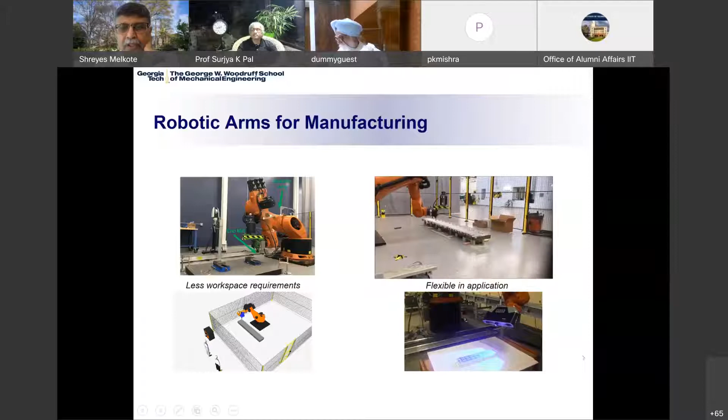But there are challenges, okay? There are challenges for us to be able to use it. And if I can go to the next slide.

So what are the limitations that actually motivate some of the work that we've been doing for the last 5-6 years or so here at Georgia Tech? Some of the limitations are that robots, while they certainly have much more flexibility, they can be adapted for different applications, they also require less workspace, they are much more compliant than CNC machine tools, for example.

Large compliance implies more inaccuracy in the part features, positional inaccuracy, orientation inaccuracy, etc., both static and dynamic. And that's a problem when you're talking about using robots for machining to produce accurate parts, where tolerances are critical. Also, because of the compliance, these robots can vibrate. They are much less stiff, at least one order of magnitude less stiff than traditional machine tools. And the vibration characteristics of robot arms are more complex than machine tools. They change with configuration.

You change the pose of the robot, you change the dynamic characteristics of the robot. So this poses additional complexity in making use of them for machining applications. And the characterization of robot arm vibratory behavior is time-consuming and expensive. This is not easy, and you will see some of the work we've done to address some of these challenges.

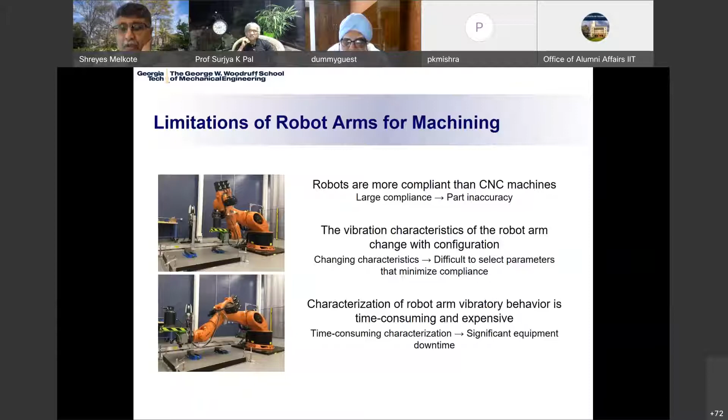So these provide some of the limitations we've been trying to address by developing technologies for accurate robotic machining. Much of it is motivated by the needs of the aerospace industry, which would like to make use of such technologies for assembly of large structures, where you need material removal in a much more flexible environment. So that's what's driving a lot of this research, both here in the US as well as in Europe and other places.

Now, what are possible solutions for low accuracy, which results from the high compliance of these robots? Obviously, we could design a robot that's a lot more stiff. People tried parallel link manipulators - these types of robots are out there, they're used, they're very fast, they certainly have higher stiffness, but their work volumes can be limited. It tends to lower flexibility, cost is also higher. You can also reduce the amount of material removed if you want to use this for machining, but that's counterproductive, because you want to maximize material removal rates, not reduce them to reduce force.

The other approach is to actually compensate for the errors in position of the robot. It's important to note that off-the-shelf industrial robots have very good repeatability - that's why they use them. Repeatability can be on the order of less than a tenth of a millimeter. But their accuracies - robot manufacturers don't quote you on accuracy because it's hard for them to do so. Even well-calibrated robots, accuracies tend to be slightly better than maybe a millimeter, which is very poor for machining applications, where tolerances may be on the order of tens of microns. So not good enough.

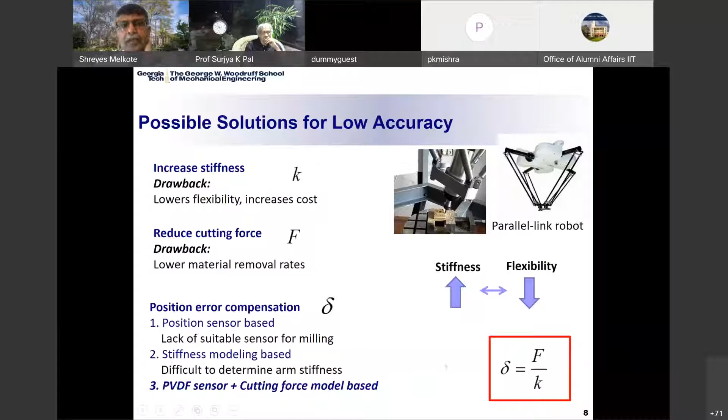This approach essentially does not require an explicit position sensor. What it does require is some way of measuring the forces in real time and then being able to estimate in real time the engagements of the cutter mounted on the end effector of an industrial robot arm, and then being able to compensate in closed loop through closed loop feedback. So the idea is to compensate for deflection errors of the robot arising from compliance by estimating the engagements - you see the cutter engagements in a typical milling operation, like an end milling operation commonly used in the aerospace industry.

You have engagements in the radial direction denoted by A, and down here in the middle, in the bottom. Let me switch to a pointer so you can see the radial depth of cut.

You can see the axial depth of cut. These, of course, affect the forces. So if you have some way of measuring the forces in real time, you can use the basic mechanics of cutting to relate these engagements to the measured forces. That's the basic idea: measure forces in real time in the X and Y directions, relate them to the engagements A and B, estimate them in real time, and then compensate for the static deflection error of the robot at any point in time.

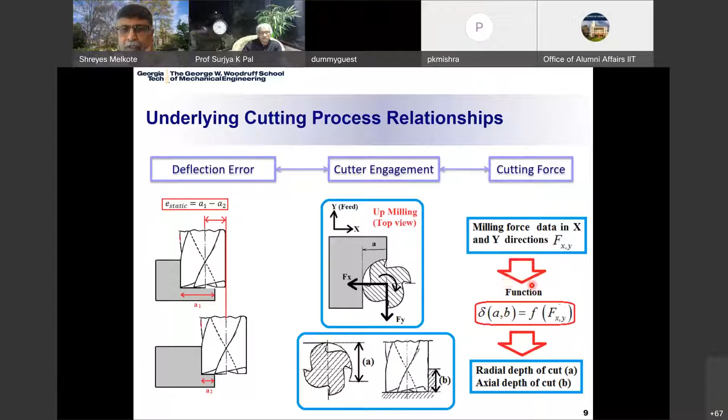That's one approach we've pursued. This is a rough flow chart describing what I just described. Essentially, you have some desired tool position as a function of time, which describes the engagements of the cutter A and B as a function of time. The milling cutter, the robot end effector, has a sensor that allows you to measure the forces in real time. Using this knowledge of the relationship between the engagements and the forces, which comes from the mechanics of the cutting operation, you can estimate the actual instantaneous radial and axial depths of cut, compare them to the desired values, and then alter the position through feedback control.

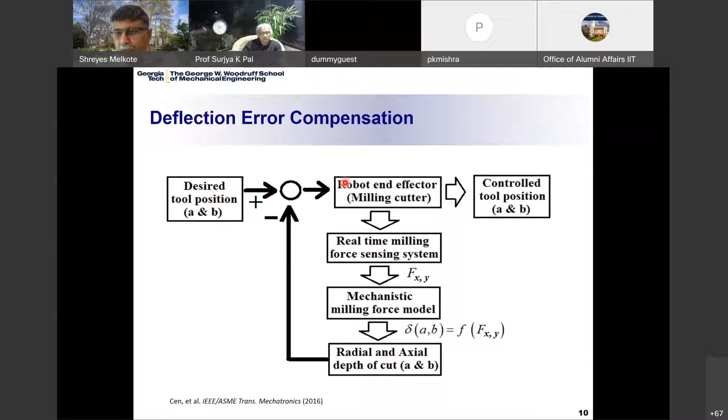This is something we've tried in our lab. I'll describe briefly how we go about doing this. For more details, I'll point you to some publications listed at the bottom of these slides, and maybe later I can share a PDF version that points you to the literature.

Obviously you have a rotating cutter in robotic milling. It's not as simple as taking a platform-type piezoelectric quartz dynamometer, commonly used in machining research, and measuring forces in real time. Even robots have force torque sensors—most robots, you can mount one—but those have their own limitations. The bandwidths are much lower than what you need for a machining operation like milling.

So what we did in previous research, described in this paper, we developed basically a thin film polyvinylidene fluoride-based sensor. It's a piezoelectric polymer film that has very high bandwidth, in excess of 10 megahertz, extremely good sensitivity, on the order of 10 microns per microstrain, and costs very little, $5 a film.

Now, this is not typically used for this application. People use them for monitoring the vibration behavior of bridges, for example—people have tried them for structures like that.

We adapted this type of sensing material and developed essentially strain gauge equivalent rosettes. We came up with rosette structures that allow you to mount them, as you see here on the bottom left, on an end mill, the shank of an end mill. There are three of them, 120 degrees apart, affixed to the shank. You develop essentially a transfer function model between the forces acting at the end effector, or at the tip of the tool, and the dynamic strains measured by these dynamic strain gauges.

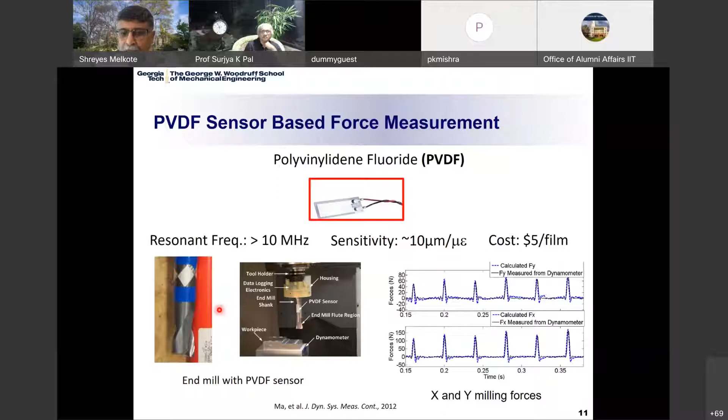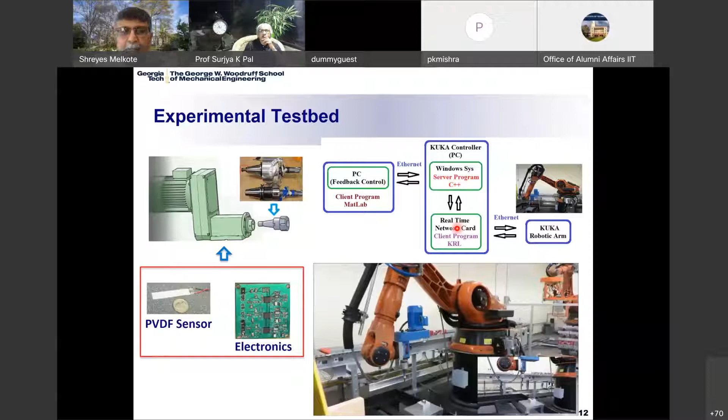This model is running on a PC. Using RSI, the robot sensor interface for a KUKA robot, you're able to communicate and modify the position of the robot in real time in response to the measured forces and the computed engagements. So this is essentially our setup, our experimental testbed. A little bit of detail - I won't go through all the mathematics here, but we can estimate the instantaneous error due to robot deflection by making use of the mechanics of the milling process.

These equations represent the average force in the X and Y directions based on the cutting parameters, as well as the instantaneous engagement of the cutter as it's going into the material and coming out of it. Using these relationships, you can measure the average force in the Y and X directions using the sensor I just showed you, and you can estimate the radial engagement, A, for a constant axial depth of cut. You can also modify this to actually compute axial and radial engagements in real time.

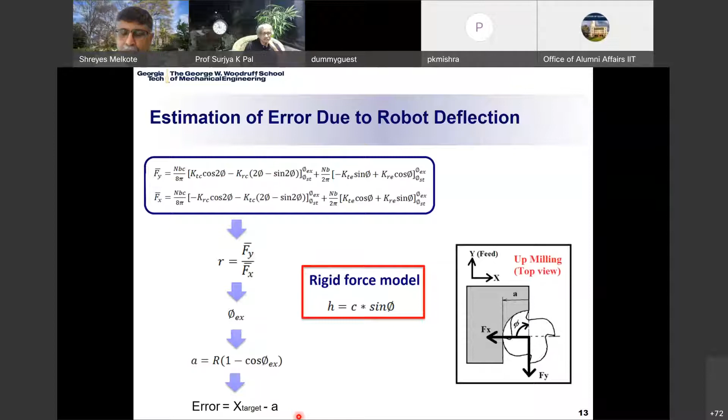This is essentially the gist of the approach implemented in that MATLAB program running on the PC. We are altering the position of the robot in real time in response to the measured forces and comparison of the desired axial and radial depths and the estimated axial and radial depths.

What you see here is a simple experiment that was done. Let me orient you - what you're seeing is basically the deviation of the machined surface. It was a step that was machined. You see on the right a step that was machined by the end mill, and the deviation of the step from the nominal. The nominal, of course, would be perfect.

If you were to do this on a CNC machine tool, which is at least an order of magnitude stiffer than a robot, you would get very little deviation at a relatively low feed - in this case 1.27 millimeters per second, which is a relatively low feed. Now if you keep increasing the feed, the deviation from this nominal or ideal situation increases, and the errors move to the left, showing the deviation. This deviation is because of the robot deflection, the static deflection of the robot at any instant of time. So these are the average deviations as you increase the feed.

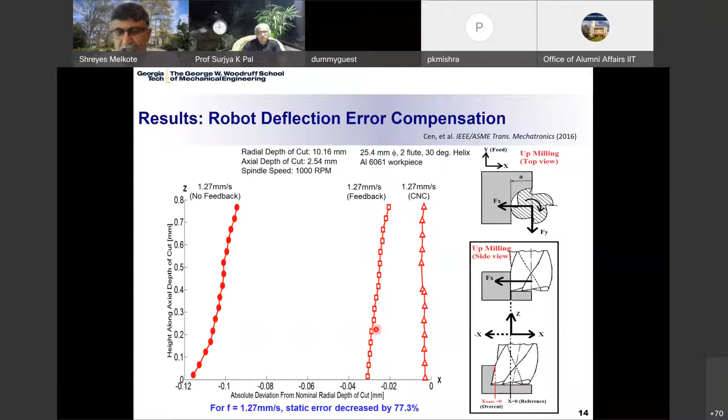This is all open loop with no feedback. Now, if I were to actually implement the feedback control, this is the improvement we're able to get because of this closed loop feedback strategy I described, which does not require a position sensor. This is not perfect, but there is still an improvement of about 78% compared to what you would get if you were not to use this feedback control. So this was our earliest attempt at actually trying to compensate for these compliance errors using novel real-time sensing approaches, which don't require a very expensive sensor.

This is work published in a journal, and details are present there. Let me switch gears. I talked about static error compensation, but in reality, of course, the process is dynamic. In this video, you can see the end mill vibrating. In this direction, when it's cutting, it's not vibrating as much, and this is because the compliance characteristics of the robot change as you move in one direction. If you change the trajectory, the stiffness characteristics change because the robot pose changes.

So this is the complexity of machining with the robot. If you have tracing curvilinear trajectories like I show you here, you can encounter dynamic instabilities, such as chatter, that most of you who have done machining certainly understand.

Here's a measurement of the forces you see below. It shows the forces in the unstable region, which was the X direction, the horizontal motion, when the robot was moving and you saw the cutter vibrating. Then when it transitions to the Y direction, where the tool was not vibrating, the cutting forces are not varying as much, clearly showing a big difference, even though the feed is constant for both directions. So this is illustrating the problem.

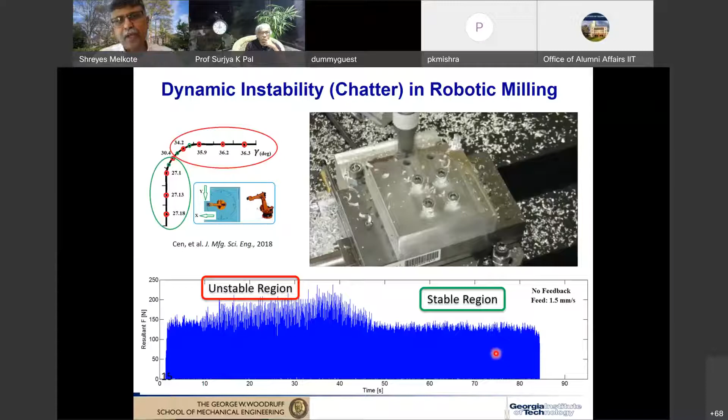Now, how did we go about addressing it? In the interest of time I'll skip the math, but I'll give you the gist of it. The basic idea is as follows.

We are monitoring changes in the average force vector. If you see the bottom left sketch, you see the changes in the average force vector denoted here, which is a function of the stiffness characteristics of your structure and the displacements in the X and Y directions, and the orientation of this force vector relative to the principal stiffness direction of the robot. The principal stiffness direction of the robot can be obtained from the stiffness matrix of the robot through eigenvalue analysis. You can see here that the maximum stiffness, K max and K min, the angle gamma is the angle of the force vector relative to the direction of principal stiffness.

So conceptually, it's easy to understand that if somehow I can minimize gamma so that the force vector causing the robot to vibrate is always oriented as close to the direction of maximum principal stiffness, then you would minimize the displacements, right? That is the basic idea. The idea is to minimize this angle gamma.

The way we go about doing this, of course, if this angle gamma is greater, then you will have chatter. You can model this as an undamped dynamic system using the joint stiffnesses of the robot, and do eigenvalue analysis to determine a chatter criterion. In this case, the type of chatter you see in robots is somewhat unlike what you see in machine tools. It's called mode coupling chatter, which is less common in machine tools unless you're doing a boring bar type of operation where you do see that happen, or something with a very slender tool, for example.

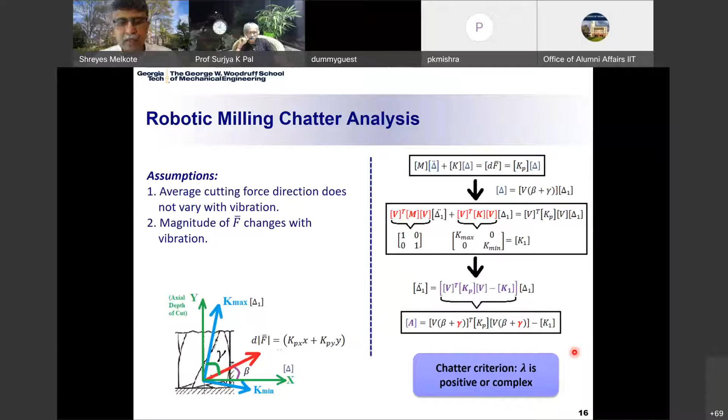Now, I described the basic idea. The idea here is to take advantage of the fact that forces that are a function of the cutting conditions influence the compliance of the structure, and the compliance of the structure determines stability. If you look at the stiffness matrix for a robot, the most generalized stiffness matrix has two terms: the joint stiffness K theta, and another term called K sub C, essentially the complementary stiffness matrix. Sometimes it's also called the conservative congruence transformation that relates the Cartesian stiffness K to the joint stiffnesses K theta. Now this K sub C is generally ignored in most robotic system analysis.

But if you don't ignore it, you find that term is a function of the force, it's affected by the force. Conceptually, think of it as: if you apply a force to a mechanical structure, it's going to deform elastically. When it deforms elastically, you're going to alter the Jacobian matrix, in this case for the robot, and as a consequence, alter its overall Cartesian stiffness. Thereby, you change the magnitude and direction of that principal stiffness vector, relative to the force vector. So this is the concept being made use of in this strategy, to try and change the feed rate, which affects the forces, which then affects this K sub C term.

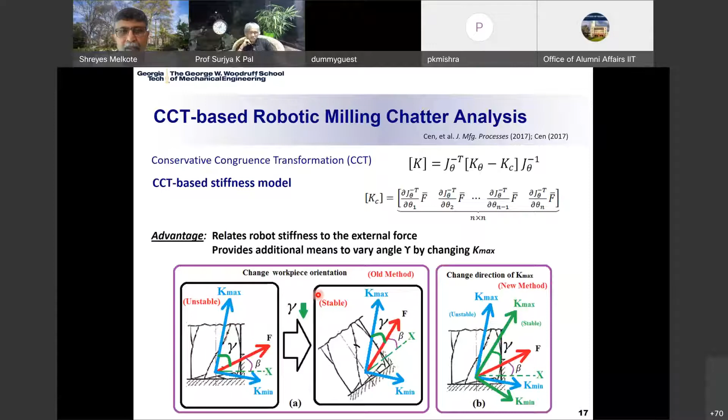The K sub C term alters the Cartesian stiffness, and therefore alters the direction and magnitude of this principal stiffness vector K max that you see below. That's the basic idea, which we implemented offline. Obviously this can be done offline.

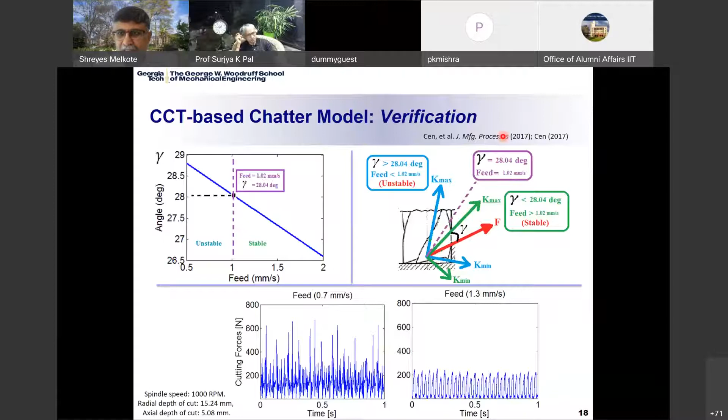Details of this are in a publication you can look through. This is further validation in the frequency domain of what's happening. At 0.7 millimeters per second, the unstable case, you are exciting the resonant frequency of the robot in mode coupling chatter, about 11 hertz, one of the lowest fundamental natural frequencies of the robot. At a higher feed rate of 1.3 millimeters per second, greater than 1.02, the energy at that chatter frequency peak is much less - substantially minimized.

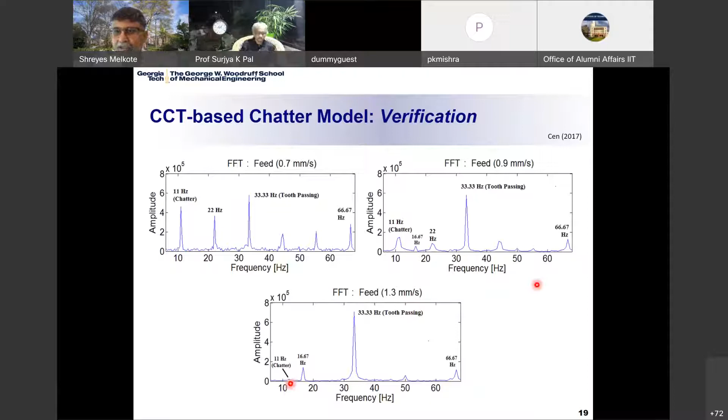We can also use these types of models to determine stability offline, as I mentioned, using a safety factor. This illustrates the same thing. In the interest of time, I'll just say that the model allows you to plan the feed rate schedule along a curvilinear path in order to avoid chatter instabilities due to mode coupling chatter. This is something we have illustrated and demonstrated.

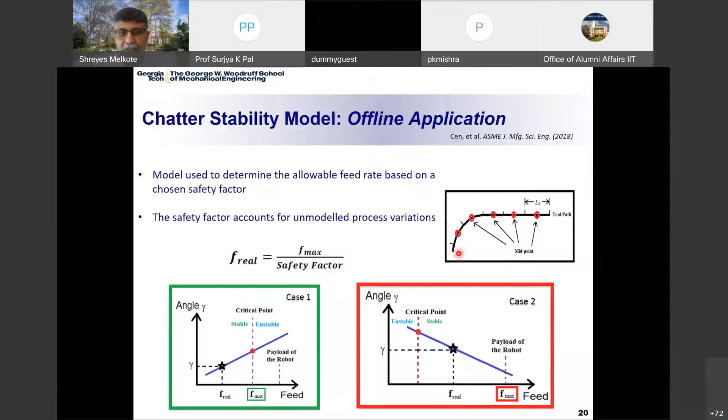Now I can use that model. Modeling is good - whatever we can model, we can predict and make the system as stable as possible prior to the actual experiment. But we cannot model everything. There are uncertainties in the stiffness characteristics of the robot, the joint stiffnesses could be nonlinear, and we simply cannot model everything. Therefore we need the ability to monitor in real time any deviations from what the model allowed us to simulate offline and compensate for it. So we need an online chatter detection and suppression method.

We've implemented that, making use of the offline method I described for planning the feed rate schedule, and then using the polyvinylidene fluoride piezoelectric wireless sensor I described earlier to monitor the forces in real time. We make use of a wavelet transform, in this case a Haar wavelet, since we know the resonant frequency of the robot ahead of time. If you didn't know this, it would be a bit more difficult to do.

Since we know the resonant frequency of the robot, which in our case is between 11 and 12 hertz for the fundamental mode excited during mode coupling chatter, we can design the wavelet transform to identify deviations in the signal when looking at that particular frequency decomposition band.

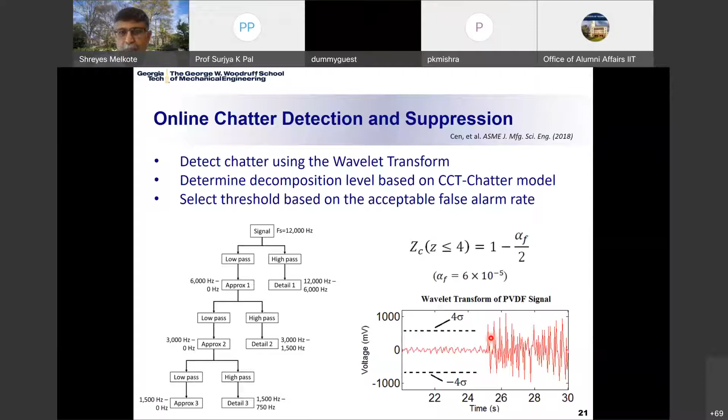We've implemented this, and I've already shown you the ability to modify the feed rate, so we can do that.

Here's an example of simulating toolpath with varying degrees of stability. X direction cutting is unstable, and when you switch to Y direction, it becomes stable. You can see the forces are much larger and vary quite a bit in the X direction, whereas for the same feed rate in the Y direction they don't vary much, indicating it's more stable. The chatter frequency, the 11 hertz, is not present in this stable region.

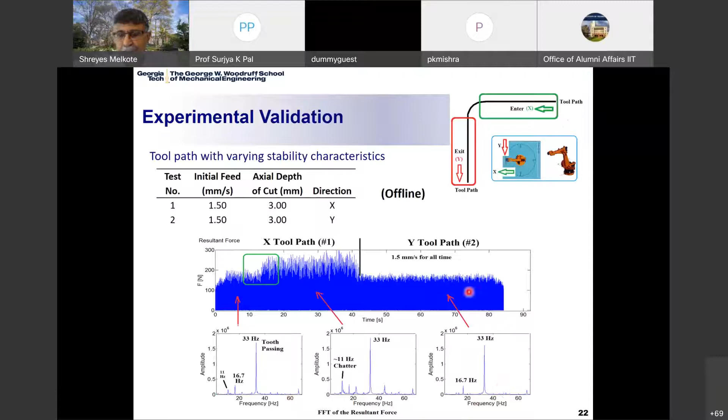We implemented this chatter detection method in real time to detect chatter and then suppress it by modifying the feed rate. Here's an example experiment that illustrates that.

In this case, you're moving in the X direction, and chatter starts. You detect chatter using the algorithm I described, and then when you switch directions, it no longer chatters. So now we've demonstrated the ability to detect chatter.

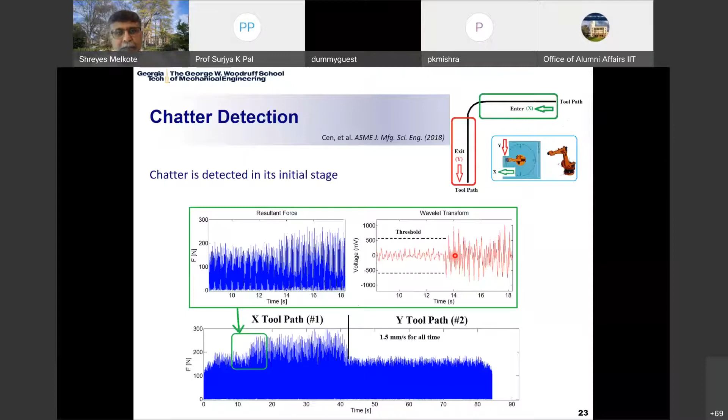We can then show closed loop feedback control by varying the feed rate itself to minimize chatter once detected using this discrete wavelet transform chatter detection algorithm. Here's an illustration of that.

You're moving in the X direction. Notice the feed rate going from 1.5 millimeters per second down to 1.2 millimeters per second as it's chattering. Once you detect chatter, you switch on feedback control and it moves back at 1.5 millimeters per second, but now it will not chatter.

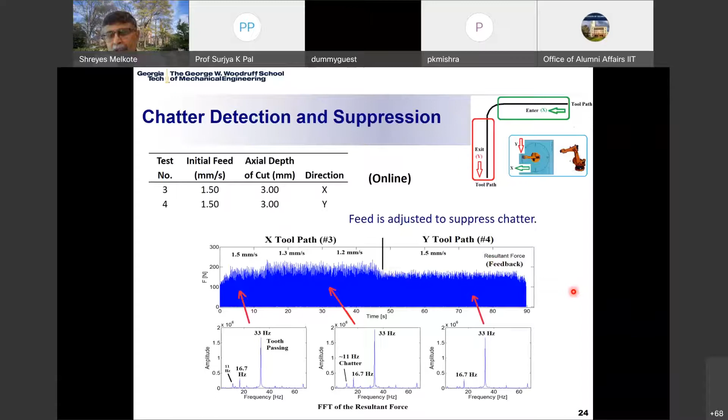So this illustrates how you might address mode coupling chatter detection and suppression in real time. I've gone through quite a bit, so I'll touch on one more recent topic we worked on, then share some other things we've done, and stop to answer any questions you might have.

I mentioned at the outset that one challenge with using robots for high force, time-dependent, time-varying dynamic operations like machining is that the stiffness and dynamic characteristics of the robot are pose dependent. You have access to a large workspace, but as you move to different points, the pose changes, the stiffness characteristics change, the natural frequencies change, dynamic characteristics change, and damping also changes.

So how do you model this? It's not easy. One thing we've done is use data-driven modeling approaches, whether you call it machine learning, data-driven modeling, or probabilistic modeling, I leave that to you. Fundamentally it's a data-driven approach, because while you can use fundamental mechanics-based or dynamics-based approaches, they won't be as accurate as data-driven ones. Ideally, you'd combine data-driven approaches with physics-based approaches. In this case, we've come up with a probabilistic model to identify the dynamic parameters, the modal parameters of the robot.

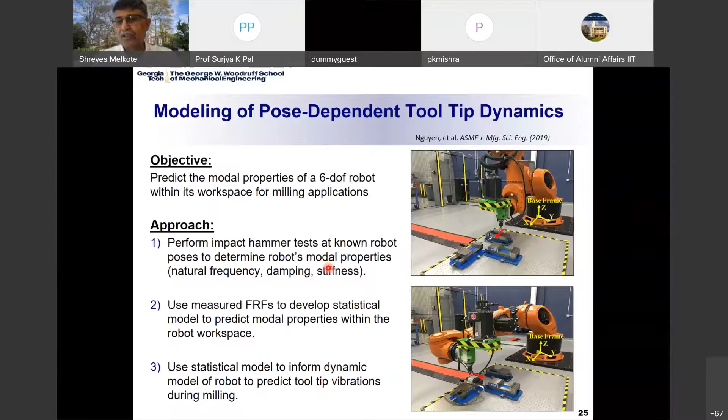You see our robot here, it's a fairly large industrial robot that is being used. The methodology is described in the paper in much greater detail for those of you interested in the modeling approaches. But it's essentially a Gaussian process regression, commonly known as Kriging in the statistical literature.

You treat the underlying physical process as a Gaussian process, and you have data that you've collected, let's say f of x as a function of x for illustration purposes. It varies somehow, in this case shown here. Then you collect data through experiments, like in our case using experimental modal analysis. Data already has uncertainty in it. This method essentially allows you to regress through the data. Wherever you know data, uncertainty is lowest. Wherever you don't know data, points in space where you did not sample, uncertainty is greater, and therefore your ability to predict more accurately is going to be uncertain in those regions.

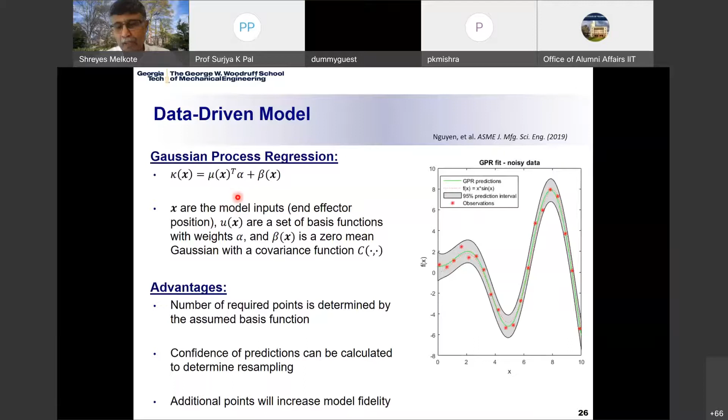So that's the idea. We use Gaussian process regression using the modal impact hammer experimental data to develop this dynamic model that describes the modal properties of the robot over the workspace.

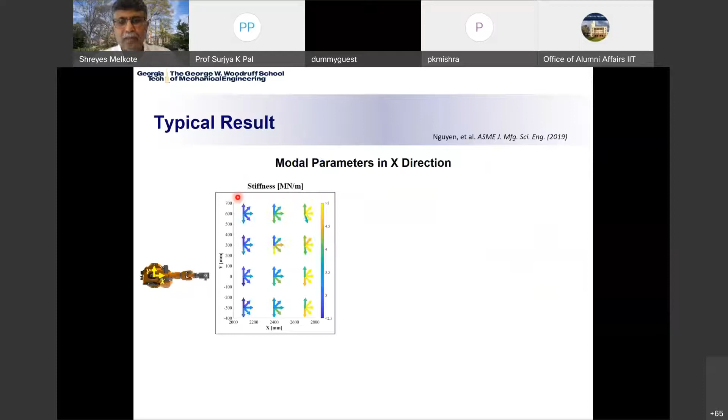What does it tell us? I'll just share some typical results, and in the interest of time I'm going to skip the animation. What you see here is basically the model that you build allows you to simulate the stiffness characteristics, the natural frequency, and the damping of the robot, which all change in the workspace, unlike a machine tool. You can see the color code here represents the stiffness value. Going from blue to yellow implies that you're increasing the stiffness.

X and Y, your X and Y directions represent the distances from the base frame of the robot, which is the origin of the robot. Think of it as the world coordinate system in this case. And as you extend the arm, the stiffness in the X direction changes, it increases, which is like essentially having a beam and you're pushing on the beam along its axis. You would expect it to be pretty stiff, right? And that's what it's actually describing.

The natural frequency shows other characteristics, obviously, and damping also changes. So this model is able to actually simulate all of these characteristics.

Now, once you know these things, you can describe the time response of the robot in these regions of the workspace. That's the advantage of building such a model.

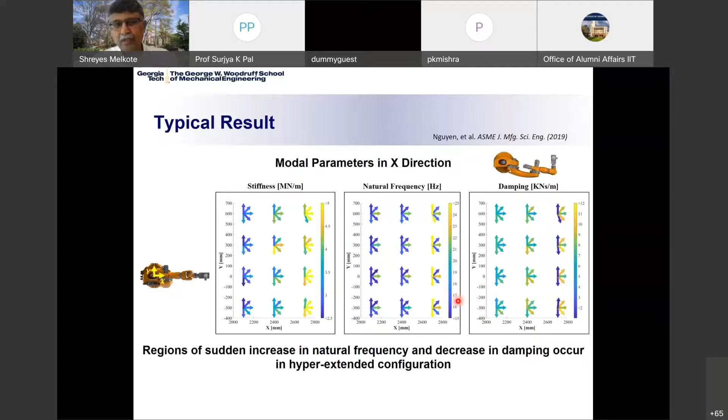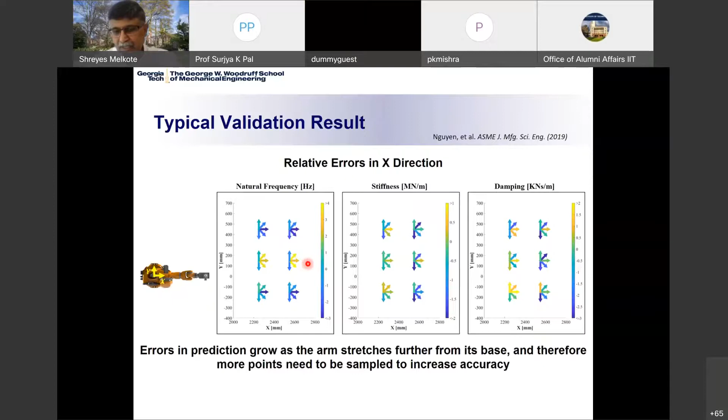So this is something we have done of late, and we can use this model to actually predict the tooltip vibrations during a machining operation. Now, for simplicity, we have assumed that this model only models the first dominant mode, the vibration mode of the robot. In reality, of course, for any mechanical structure, especially a complex structure like an industrial robot, you have multiple modes of vibration. But we ignore the higher order modes, which typically have higher damping anyway, and then focus on the lowest order mode, which contributes the most to the displacement characteristics of the robot in time.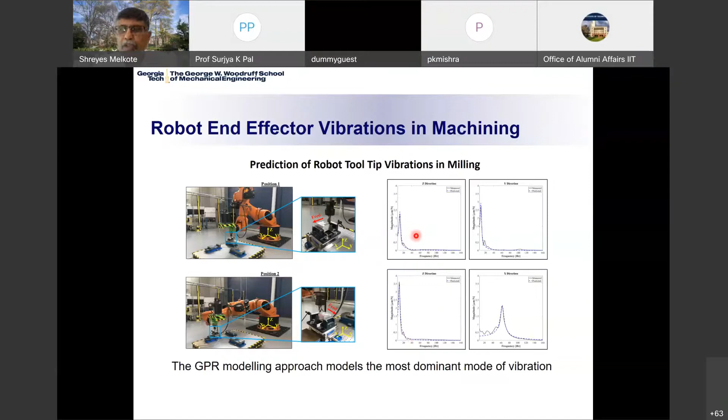It's predicting the first mode quite well, and we use this mode to predict the dynamic response in a machining operation, like milling, at two different points in the workspace, and compare them with the peak to valley vibration of the robot, measured using a 6 degree of freedom laser tracking system in our lab that lets us look at the dynamic response of the robot in real time and compare the predicted data-driven model with the measured. Pretty reasonable agreement.

Obviously it's not perfect, we cannot model everything. There are some obvious assumptions being made in our data-driven model as well. But nevertheless, being able to predict most of that vibration gives us significant leeway. It provides several advantages in being able to come up with a tool path or path plan that minimizes the dynamic displacements of the robot, and therefore improves accuracy at the tooltip.

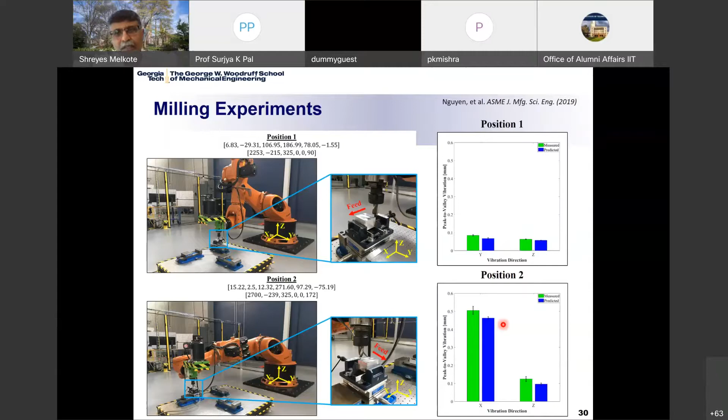All right, so my almost last slide here. I want to point out there are a bunch of other things we've done in the recent past that you can look up in publications. We've also looked at disturbance rejection of vibrations, using optimal control strategies.

In reality, it's hard to compensate because the bandwidth of the control system for the robot is limited. Your ability to change the robot's position at higher frequencies is limited. We cannot exceed about 20 hertz on our robot. So lower order frequencies, or resonant frequencies of the robot, you can compensate, which we've demonstrated through optimal control strategies in the first work I list here. But higher order modes, higher frequencies, are harder to compensate. You need other methods for that.

We've also done some work on pose optimization. This is offline optimization of the pose using both static and dynamic stiffness models, to answer the question: which model would you use when? Under what conditions can you get away with just a static model of the stiffness of the robot versus a dynamic model, like the one I just showed you?

We've also done some work more recently on methods to enhance the accuracy of the data-driven dynamic model I just shared, over a much larger region of the workspace, which you can also look up.

And there's some work we haven't published yet, looking at using the laser tracker as real-time feedback, metrology-aided real-time feedback. This is ongoing work, being able to compensate in real time by tracking the robot through the 6-DOF laser tracker system, using an inertial measurement unit as well for sensor fusion purposes, if you want better state estimation of certain states of the robot. So these are things we're still working on.